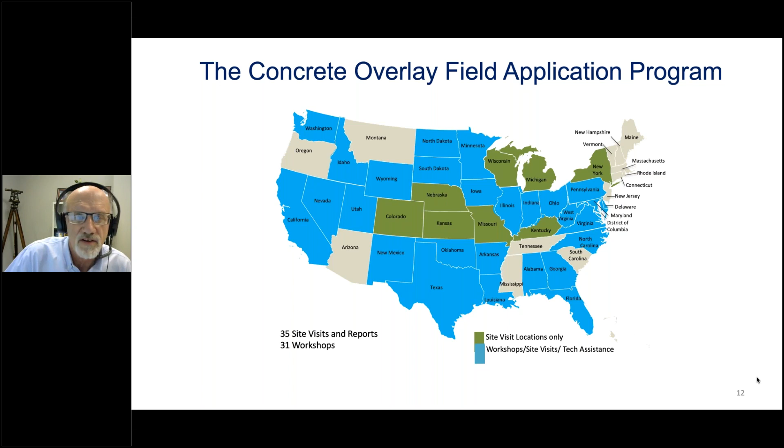We visited 35 sites and wrote reports, did a lot of specific project reviews to make sure we were picking the right candidates if somebody wanted to build a project. We had 31 workshops, covering a great portion of the nation, including work on overlays and presentations in Florida too - I think Eric Farabee and several others were involved with that presentation.

But now it's 2020, and what a year of significant change for all of us. So we're really trying to figure out what these changes mean.

How do we get the word out to people to share the information that we've done so much here in the past few years? We're not traveling, obviously.

I was out at the Con Expo event in Las Vegas on March 12th. I took one of the last flights out of Las Vegas, I think, before the shutdown occurred. Got home, and that was on a Thursday. I was told on Friday that I didn't need to come to the office because they were concerned whether I might have contracted the COVID virus. I didn't, fortunately, but I did stay home, and then they called me Monday to say we weren't coming back to work. We would be working from home for an extended period of time. And now that extended period of time seems to be that it might be at least until the end of this year. We do get into the office occasionally, but certainly nothing like we did previously.

So we're doing a multitude of webinars, and I'm sure you are too. Online meetings nearly every day. It's really changed the way that we do our business. Email is unlimited, it keeps coming in. That's our communication, and it certainly has grown significantly.

We're working from home, but the good news for us is our lab is still open. They're practicing precaution, but they are still doing some work. So we've got some research going on and some good things to be excited about down there.

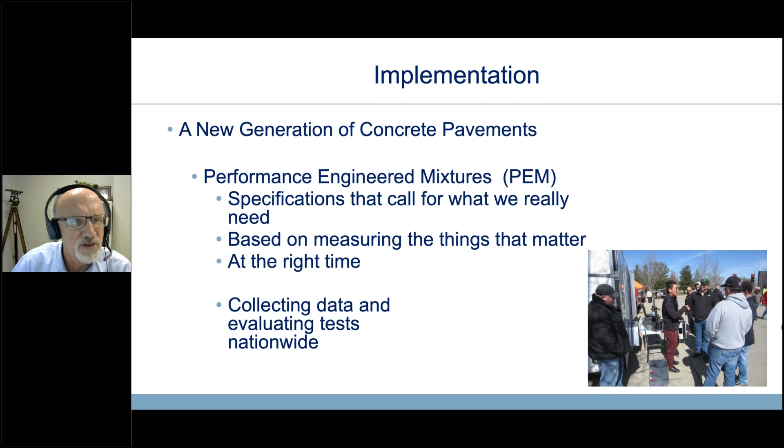One of the tests we've used for years and years gives us some sense of consistency, but slump doesn't really tell us how a pavement's going to perform from a durability standpoint. So we want to do these measurements with tests at the right time. We're now collecting data and evaluating the tests nationwide.

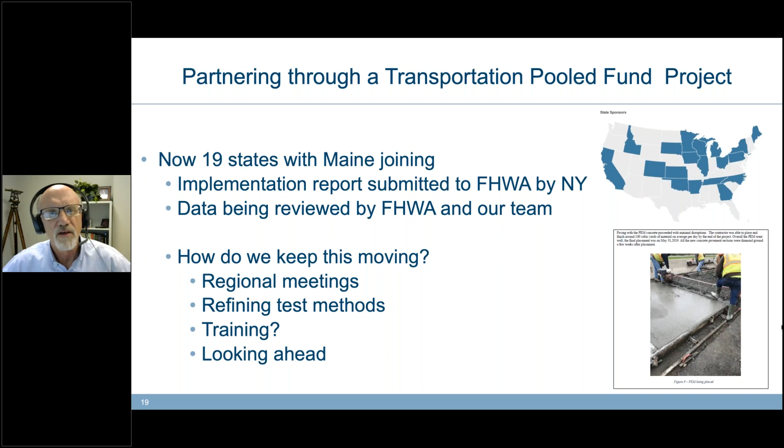We're doing a lot of data work with Federal Highways very closely on this, and Mike will get into that. But what we're looking at now is doing some regional meetings to try and share information about what other states are doing, to encourage one another. We've involved industry and agency in those. We're refining some test methods. We're looking at training, how we're going to continue to do that in the future, and then also looking ahead—once we establish our efforts in mixes and mix design, we need to look at construction too, as part of the whole combination of things that make our pavements good.

We are in a new 5-year cooperative agreement, signed in 2018 with Federal Highway Administration. It's a $9 million, 5-year agreement, and the focus areas defined by Federal Highways in this Advancing Concrete Pavement Technology Solutions agreement are extending pavement life and performance. We're looking at different ways we can do that: reducing initial and life cycle costs, accelerating construction techniques especially on the concrete side, design criteria and specifications, and non-destructive testing. Those all fall into the 5 groups of areas that we're looking at.

In order to get that information out and implement some of that new information, we have to have a good technology transfer system.

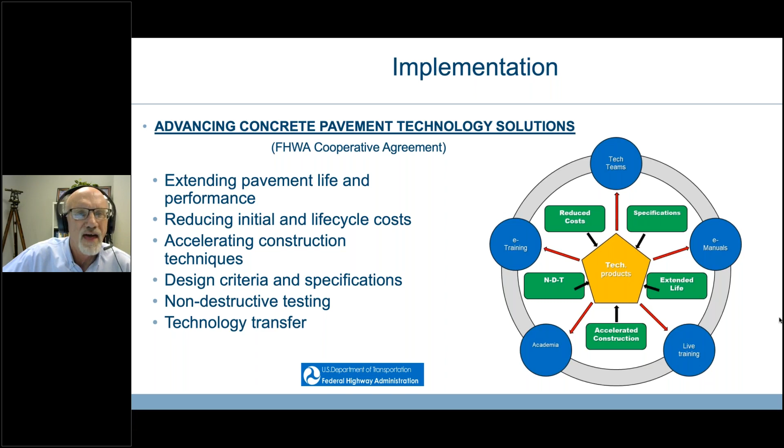We're looking at some of the new training that's out there, new opportunities. Most of our publications are now going to e-manuals, we're not doing a lot of printing anymore. We're working with academia as to how they might get information out through their classes. We've always had and will hopefully continue the live training, but we know e-training is going to be important, and we do all of that through teams of people working with us.

Some of the products coming out very soon include a fly ash tech brief addressing the use of reclaimed fly ash in highway infrastructure. I think that was just put up on our website this past week. The same group that worked on that is working on a recycled concrete aggregate tech brief.

We're also working on a big endeavor. Tara Cavalline in North Carolina and a team of people are working on a QC guide with PEM. Mike Praul, my compadre who's going to speak after me, has been very involved in getting that to happen. We're hopeful to have the draft available in the next week or two and start doing the reviews so we can get it out on the street.

We're also updating the CP Tech Center's overlay guide. This will actually be the 4th edition of this guide, which has been so popular over the years. We're also working on preservation guides.

Currently there's $2.3 million under contract. In order to get the contract, we had to offer a match, and we were able to get support from industry and others to offer a 25% match. We've got 20 consultants involved from all around the country.

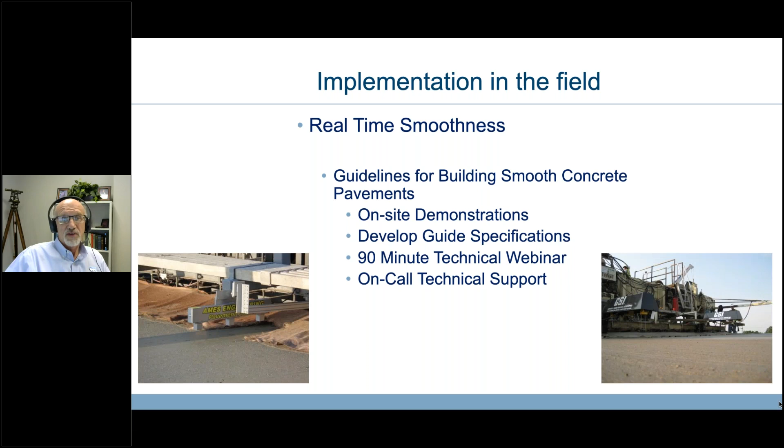In field implementation, one of the things we often talk about is a consultant doing work with real-time smoothness. We've got equipment that hooks onto the paver and tells us the smoothness at the time we're building the pavement. We've been doing on-site demos, developing guide specs, had a 90-minute technical webinar that we share, and provided on-call technical support. Gary Fick, with Trinity Construction Management, has been the lead on that, and it's one of the things we did in a previous cooperative agreement that we're continuing in the current one.

Just a note that this last week or within the next week or so, we are going to be entering a cooperative agreement also with the Federal Aviation Administration. PCA and ACPA have been working with us on that, and there will be a $3.5 million contract for research.

The CP Tech Center will act as the research managers, and we're trying to get focused on what topics FAA would like to work on. Some things that have come to the top are not unlike some of the stuff we've done with Federal Highways, including ASR and mixture proportioning. Our hope is that we can do a little collaboration between federal organizations too, and make everybody's money go a little farther and advance the industry even further.

We've got a lot of other projects we've been working on, some IDIQs and that type of thing. I'm not going to read down through all those, but you can get a sense of what we've been doing.

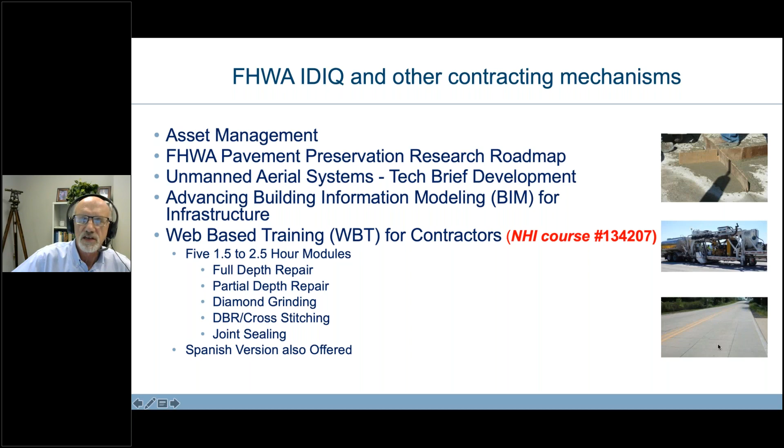So as far as research is concerned, we don't do all the research by any means. In fact, we do some research, but a lot of it is going out through these cooperative agreements to other folks. Certainly that will be the case with the FAA contract. We won't, as CP Tech Center, be doing any of the research per se.

We're just administering it, but we're doing some stuff in our lab with mixture proportioning, air void systems, salt scaling, the effect of chemistry in salt scaling, internal curing, overlay performance. We're doing a lot of work with fibers.

We're monitoring that to see how it works with the fibers. We're doing some work with penetrating sealants, primarily to develop a protocol for states that want to use these types of sealants, especially in some ice zones where they've had joint deterioration—how do you determine the right product? We're putting together information through a project on that.

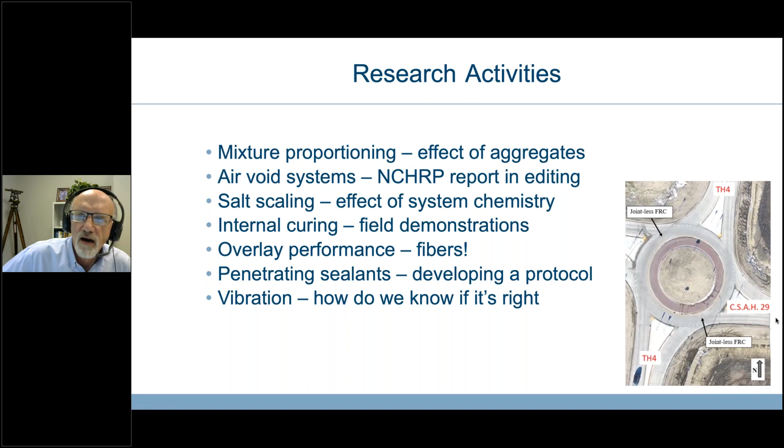We're also doing a lot of work on vibration, trying to determine how we know if it's right, what is right, and also looking at the possibility of real-time monitoring—that's an emphasis of that work.

So, finishing up, here's what we've got: a lot of manuals and guides. I'm going to thumb through a few of the different publications. I already mentioned the overlay guide, and we've got one on recycling concrete pavement materials.

This concrete pavement distress and assessment solutions manual is a large document that our former director, Dale Harrington, and the team put together. It talks about different types of issues you could have with a concrete pavement, identifies those, explains why they might happen and how to address them. We also have a companion document on concrete overlay construction.

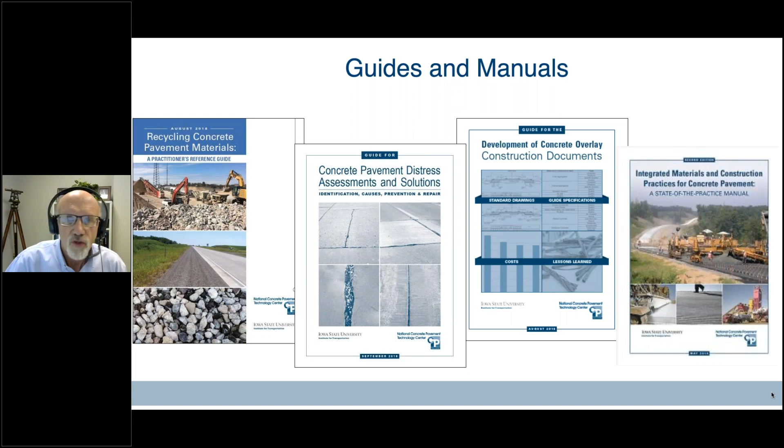And then there's the IMCP manual, which was just published in its second edition this past year. All of those are available on our website—some are in print, but all are certainly available as PDF publications.

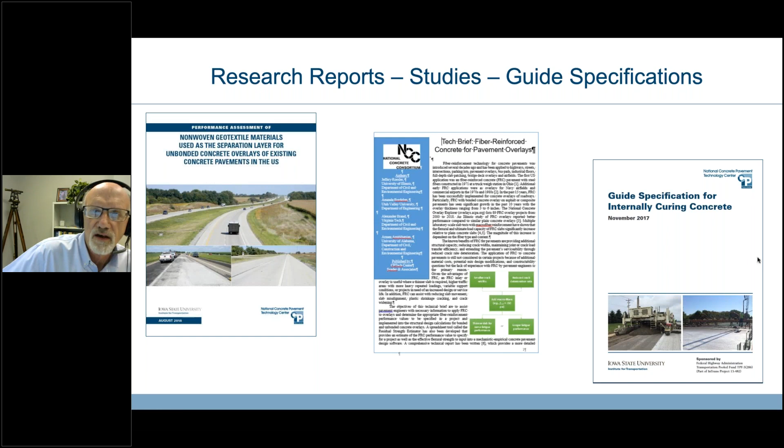Here are some examples of research reports, studies, and guide specs we've put together: non-woven geotextile materials; Dr. Jeff Roesler at the University of Illinois has done a lot of work with us on fiber reinforced concrete, putting together a software system to help evaluate the needs for different designs; and Dr. Taylor has done a lot of work on guide specifications for internally curing concrete.

Another effort through NC Squared has been the CP Road Map, where we develop Moving Advancements into Practice briefs—we call them MAP briefs—and we're up to around 20 or so. Those are short briefs on different subjects, and they can be found on the website.

Upcoming, we're working right now with PCA on a cement stabilized soils publication. In fact, I think that's now ready to go to the printer or will soon be up on the website. Lightweight cellular concrete is another one we're working on with PCA.

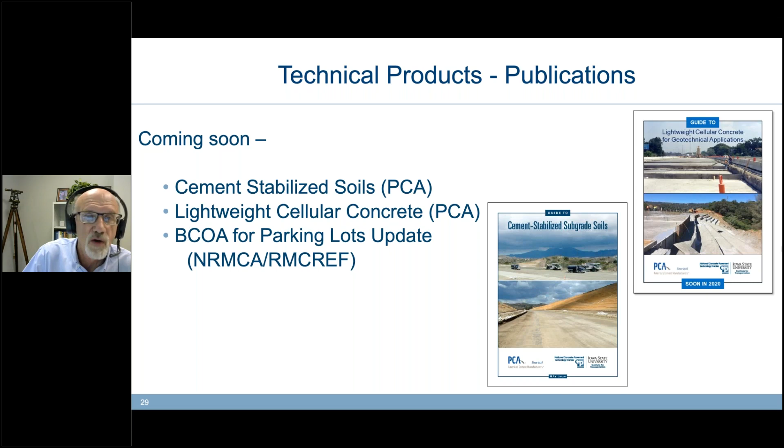We're also talking with the National Ready Mix Concrete Association and the Ready Mix Concrete Research and Education Foundation about doing a second edition of bonded concrete overlays for parking lots—an update of a manual we developed in 2012. When you're in this business, you know things do change over an 8, 9, 10-year period.

If you want to know more about PEM, there's a link to our PEM portion of the website, and there's one for overlays too. Get on there sometime and see what's there, so if you need some info, you'll know you can find it.